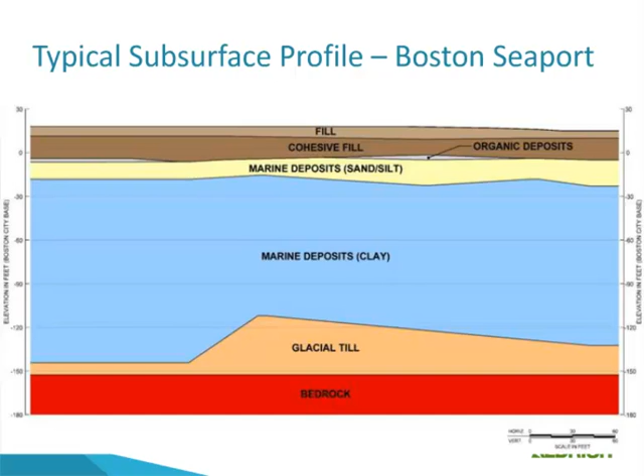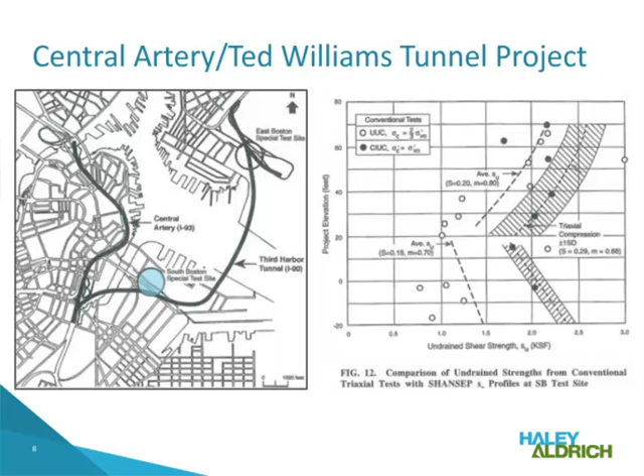Haley and Aldrich has a lot of experience with deep excavation in the South Boston Seaport area, here highlighted in blue. Another piece of infrastructure that also provided a wealth of information for geotechnical engineers in the area is the MBTA Silver Line, which passes basically through the center of the Boston Seaport area.

It would take all afternoon or perhaps more for us to talk about all of the things that we've learned from excavations in Boston Seaport. So I'm going to try and summarize some of our biggest lessons learned by using two example excavation projects, which I'll call Project A and Project B.

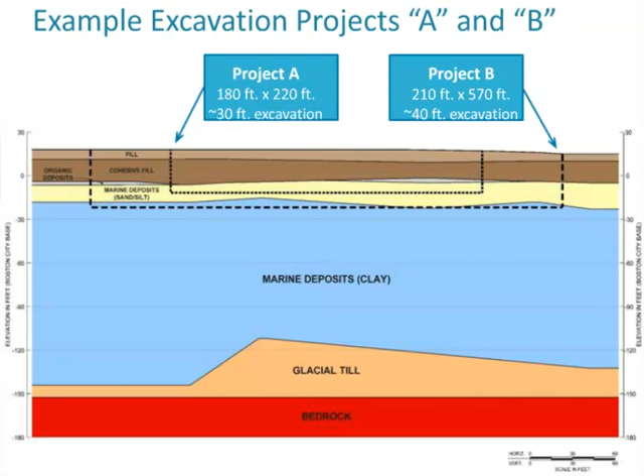Chronologically, Project A came first, followed by Project B. Project A was relatively large, 180 feet by 220 feet, and approximately a 30-foot excavation. But Project B was much larger, 210 feet by 570 feet, and about 10 feet deeper than Project A. You'll notice in both of these cases that the excavation goes plus or minus to the top of that Boston blue clay layer.

So, starting with Project A. Project A was supported by a steel sheet pile wall with one level of internal bracing. We monitored the excavation using inclinometers installed at several positions outside of the sheet pile wall around the site, and monitored throughout the course of construction.

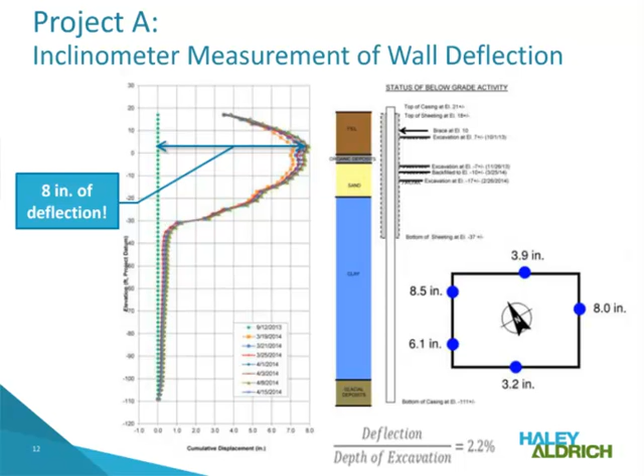I've got inches, so up to about 8 inches on the x-axis, but this inclinometer is 130 feet long and is toed into those very stiff glacial till deposits. So this isn't something that came out of nowhere. We were watching this story unfold throughout construction.

In another location on site, we actually accelerated construction to get the mat foundation in as quickly as possible. In both of these situations, either backfilling against the sheet pile wall to keep soil levels high or placing a mat foundation, both resulted in controlling excavation wall movement.

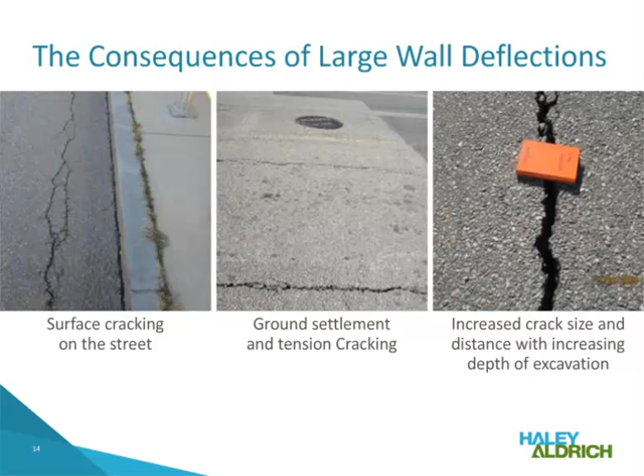So what are the consequences of 8 inches of deflection in your SOE wall? Well, there was surface cracking on the street, and there was ground settlement. While the city was not too thrilled with these results, you should also know that at the time this parcel was being developed, there were virtually no other major buildings in the area.

But how do you get to 8 inches of deflection? Possibly soil properties were too aggressive. Additionally, and definitely a large player in this case, the SOE system was not stiff enough. For instance, they could have used a heavier sheet pile, a concrete diaphragm slurry wall, or multiple levels of bracing. Another contributor could have been global effects, deep-seated movements in that Boston blue clay, or time-related effects for how quickly the excavation was proceeding. In reality, it was probably a combination of all of these things.

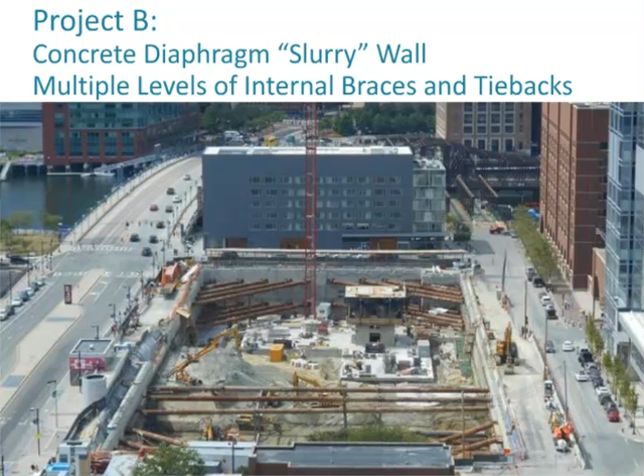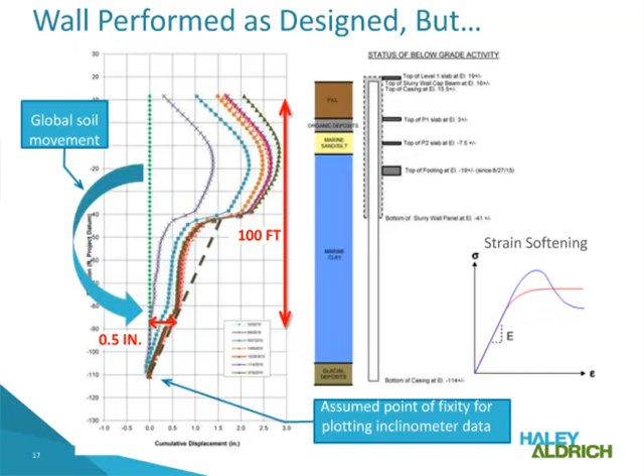So to summarize, it's really important to know your soil in a deep excavation area. Part of that is the subsurface investigation and soil testing. And then, even more importantly I'd argue, is understanding the soil models you're using for design and analysis. You need to know basically what you do know and what you don't know in terms of what those models are or are not taking into account.

Secondly, instrumentation and monitoring are critical for these types of projects. In the best case scenario, they are a validation of your design, and in the worst case scenario, they give you the opportunity to react before long-term project issues arise.

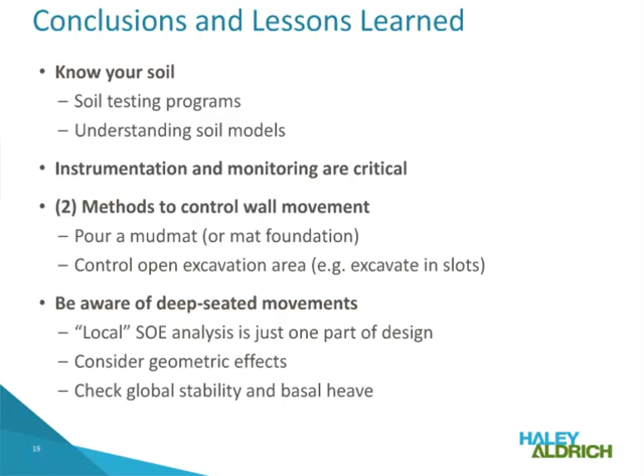Lastly, a caveat to beware of deep-seated movements. The local support of excavation analysis is really just one part of the design. As a geotechnical engineer, it's important to also look at the larger global effects, which take into account construction time and geometric effects. Checking global stability and basal heave is really important in looking ahead at how your project will perform. With that, I will conclude.

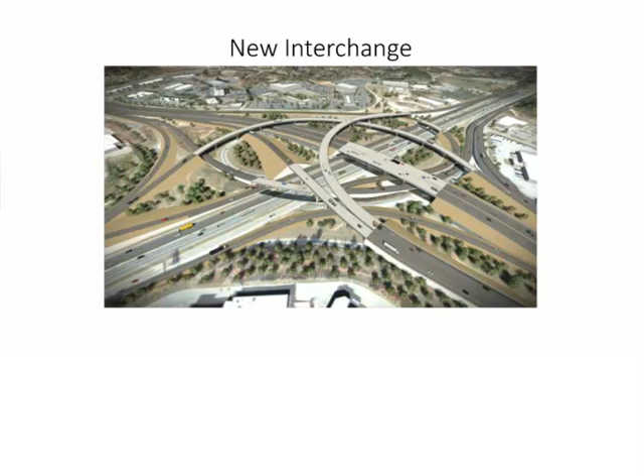More specifically: replacement of 5 miles of roadway, construction of 10 new bridges, widening 2 existing bridges, roadway widening beneath 1 existing bridge, construction of new embankments over 50 feet, and construction of new MSE walls in excess of 50 feet. As a member of the project team, we came up with some design-build concepts for some earth-retaining structures that I think were a little outside the box and saved the project some money and time.

One of these was a wall called Wall 32. Widening of I-385 in one section required a new embankment about 60 feet in height on each side. They decided to do this with MSE panels instead of sloped embankments. The existing travel lanes had to remain open.

The max embankment heights were on the order of 50 to 60 feet, with a total length of this embankment, or MSE wall system, of about 1,100 feet.

To install this full-height MSE system, it would have required one of three things, in order to keep the travel lanes going: either a 50-foot tall rigid temporary shoring system—sheet piles, H-piles, tiebacks, the whole thing—or laying back into the existing travel lanes, which was clearly not an option to maintain travel, or what we decided to utilize: a shored mechanically stabilized earth wall.

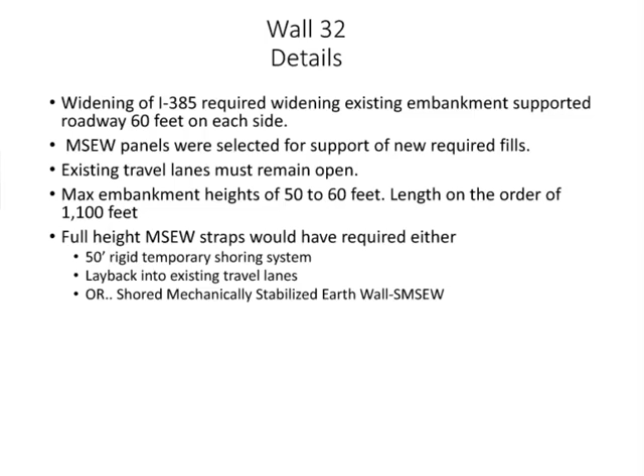For those not familiar with those, this is actually an NCDOT concept. Basically, the concept of the shored MSE wall is you install a permanent soil nail wall into these cut slopes. You utilize the permanent soil nail wall to account for the global stability of the system.

So you can shorten up your strap lengths when you build the actual wall. Instead of a 60-foot wall with strap lengths of 60 feet long, now maybe you're building a 60-foot wall with strap lengths of 30 feet long, going a little longer up over the top. That's obviously a little more cost effective. The added benefit is that when you're excavating, this permanent soil nail wall can act as a temporary support.

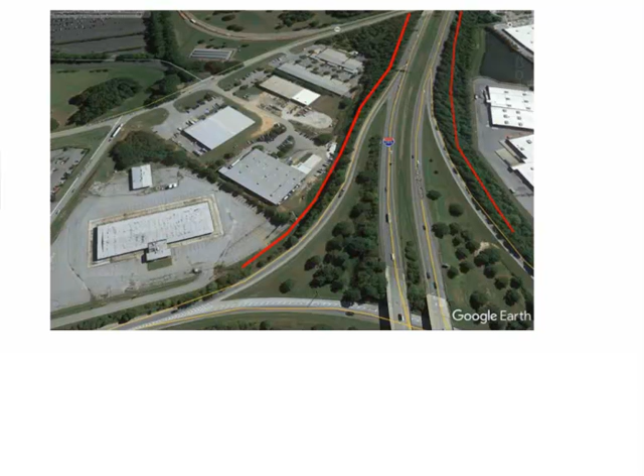So here are the existing travel lanes. On this next slide, the red line is basically the location of the MSE wall face. The blue line on this next slide was the location of what we called Wall 32, or the soil nail wall for the shored mechanically stabilized wall system.

Soils on the site consisted of typical embankment fill, fairly clean embankment fill in most areas, underlain by residual soils and then PWR—so a fairly typical profile for here.

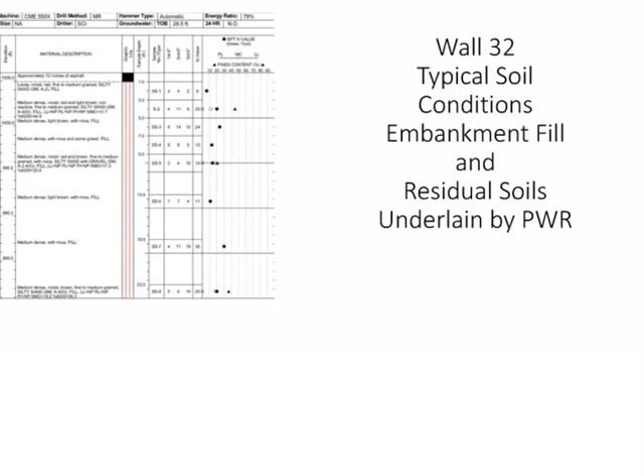This slide is just a general wall design. We had typically 25 to 35 foot nails, generally 5 foot by 5 foot spacing. Wall heights again from 10 to about 35 or 40 feet.

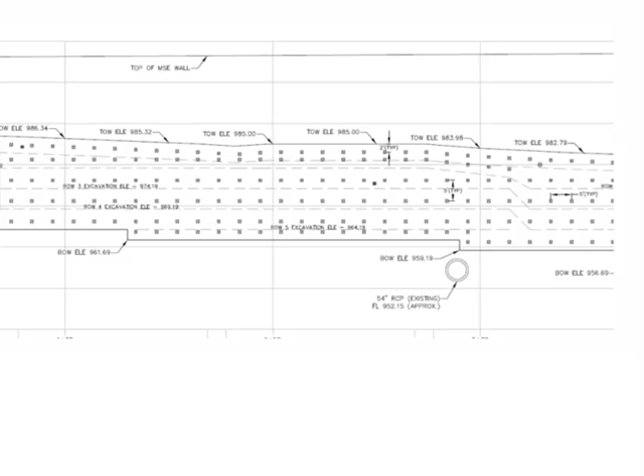Here's some of our construction phase photographs. Obviously our soil stands up pretty well for us—we're nailing embankment fill, and it was actually fairly competent. We did run into some debris in some areas, but nothing we couldn't fairly easily work around.

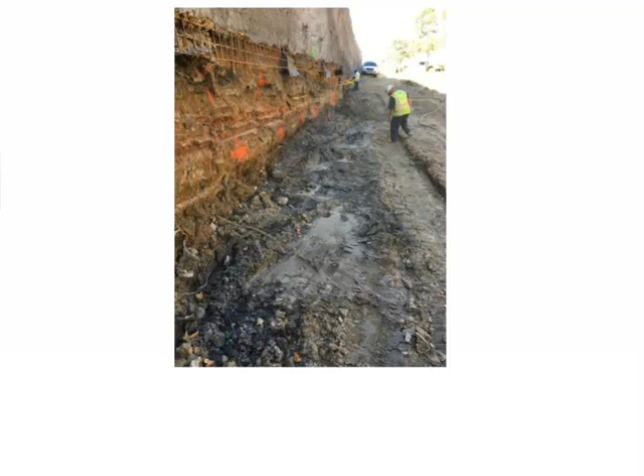Here's our end result. We don't need a terribly planar finish because the whole thing's being buried, but we do need to encapsulate the nail heads for corrosion protection.

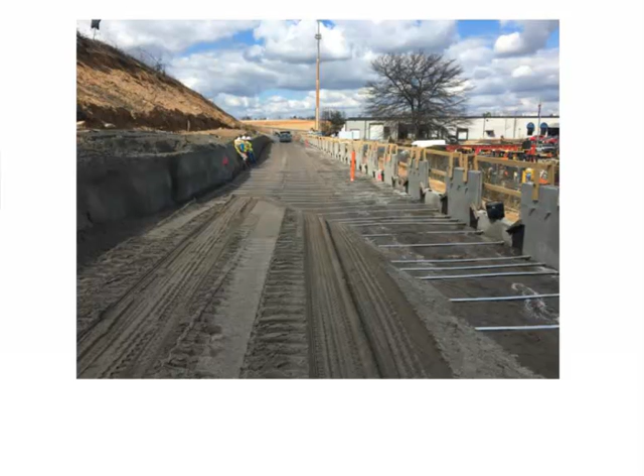This gives you an idea of the scale of the wall during construction—probably not a record-setting wall, but a fairly tall wall. You've got your straps running back to the soil nail wall. There's an FHWA manual on SMSE systems, and obviously there doesn't need to be a positive connection between the soil nail wall and the straps.

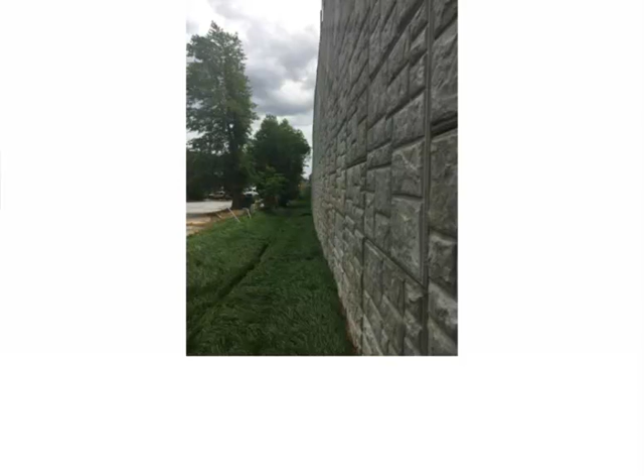So now moving on to another challenge we had in the project. This is what's called Woodruff Road Bridge, a heavily trafficked main thoroughfare in Greenville. This bridge goes over 385, and the intent was to widen that, so you'd have 2 more travel lanes on either side. Here's your existing structure, supported by a combination of driven timber piles and driven steel piles, supporting the embankment.

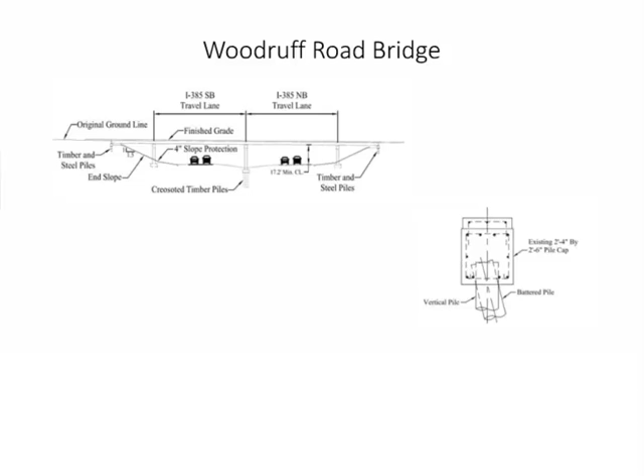So to widen this, we had to basically cut down right in front of the existing abutment and create a retaining system. Your existing condition is a typical concrete bridge with a concrete-faced sloped abutment. This shows you the existing condition and kind of the challenge we were given.

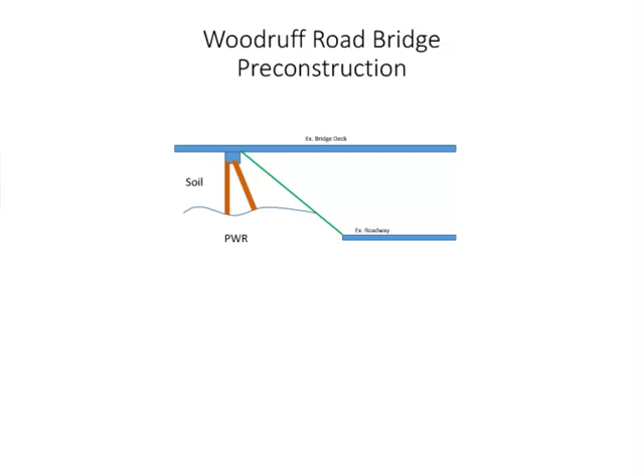We have these driven timber or steel piles in alternating batter—one vertical, one battered—driven down to weathered rock, but the bearing surface of those piles was above the new roadway surface because they hung up in this shallow weathered rock. So here is what the proposed new condition was: a wall directly up against the abutment.

Obviously the existing timber piles were projecting through the face of that wall, so you have an issue of the timber piles being in the way, and also as you work your way down, you're going to undermine the support of those timber piles. So we took that opportunity to come up with a solution that seems to have worked fairly well.

The department did not want us attaching positively to their bridge or abutment in any way. We suggested perhaps going through the bridge deck or attaching to the new abutment, but they did not want to do that. So what we proposed was a micropile-supported new pile cap with a haunch on it to grab the existing pile cap, and then a series of tieback anchors into that to basically provide support for the bridge.

This allowed us to work our way down and actually cut off the existing battered timber piles as we went, with temporary support in the interim phase, and install a soil nail wall to create the retaining structure.

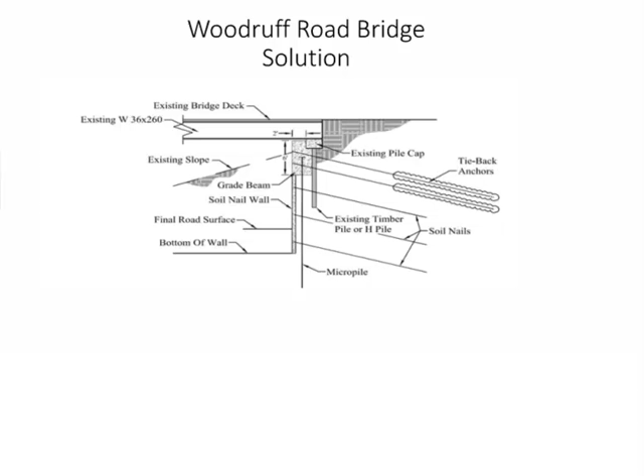Our general sequence: install and test micropiles to make sure we have adequate support there. Excavate the first stage of our bent cap. Temporarily support the individual timber piles as necessary with hydraulic jacks. So the battered piles that we would actually have to cut, we would use jacks to support these, and they would eventually get cast into the beam itself.

Install the micropiles, remove the battered timber piles as necessary to allow for the grade beam reinforcing steel, because they didn't want timber piles in a new grade beam for corrosion concerns. Cast the stages of the grade beam, and install our tiebacks. We actually staged the grade beam excavation and construction so we didn't have too large of an unsupported area at once. Proof test and lock off the tiebacks, and then proceed our way down in 5-foot lifts, installing our soil nail wall.

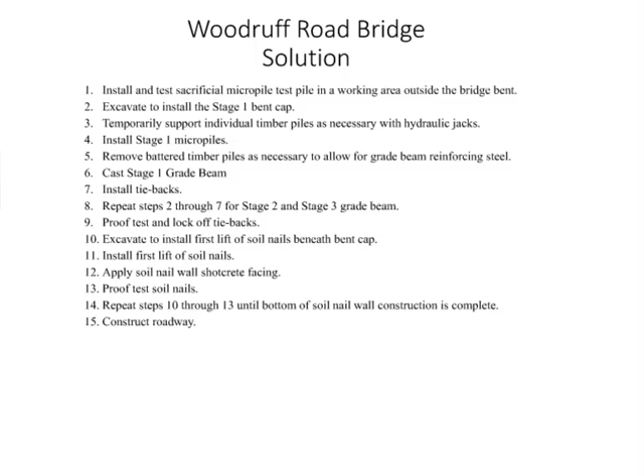Here's a little more detail on what we wound up doing. Again, you see the battered piles that we had to cut off, grabbing it all with the haunch and the tiebacks, and you can see the micropiles there as well.

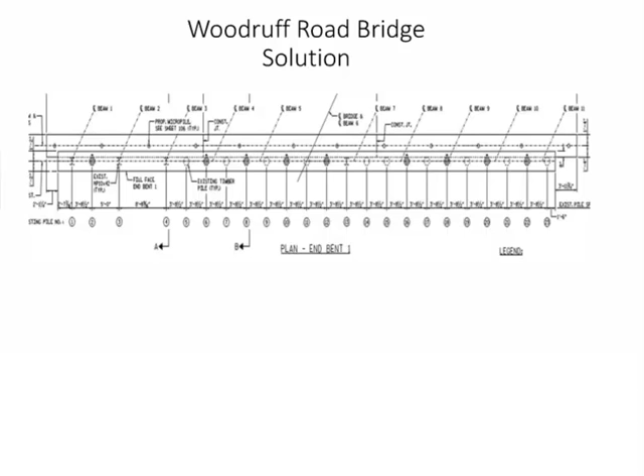Here is the start of our work. Obviously access is a bit difficult because we can't dig more than 4 or 5 feet at a time, so we had to use a limited access micropile drill to install these micropiles in some fairly tight spacing.

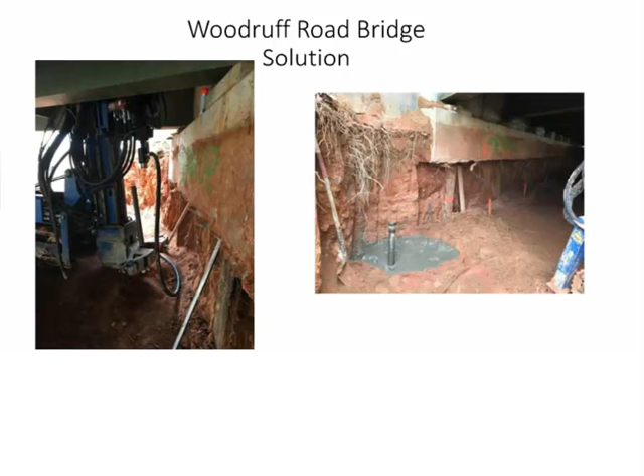As you can see, you have a micropile installed, and as you work your way to the right, you can start to see the existing piles excavated. We work in soils, fortunately enough for us, that have fairly high shear strength values, so here you can see we're able to make these nice 5-foot cuts, and here you can see the battered piles projecting through the wall face. Those were later supported by jacks and cut off.

Here's a section where they had actually driven steel piles. As you can see, here's our forming of the grade beam, with micropiles protruding into it.

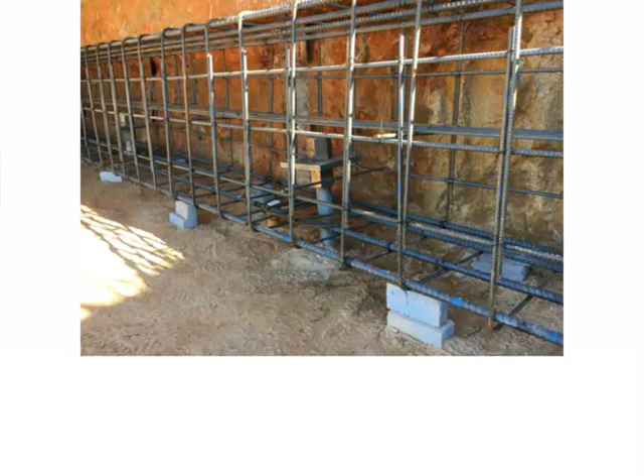Grade beam was cast and the tiebacks were installed in tension, so now we have secured the abutments. Of course, we've got to stage our excavation appropriately on the way down so that we don't cause bending issues with the micropiles. We can't go in there and make 7, 8, 9-foot cuts and expect those piles to do their job without some buckling. So we had to control the grading contractor on that end.

And here we are working our way down with our soil nail wall. You can see the new cap at the top and the soil nail wall as we work our way down. Another construction phase photo.

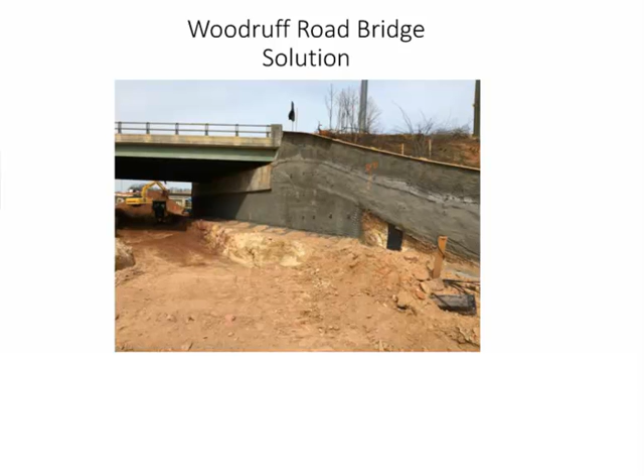And here is the end result. So instead of having an embankment there, you've now allowed for 2 travel lanes and captured the existing bridge. So all in all, we feel like it was a pretty good solution for everybody involved.

So thank you. Obviously, we had designers, SCDOT, the contractors, Flatiron and Zachry. We appreciated all their help on the project. So with that, I'll answer any questions.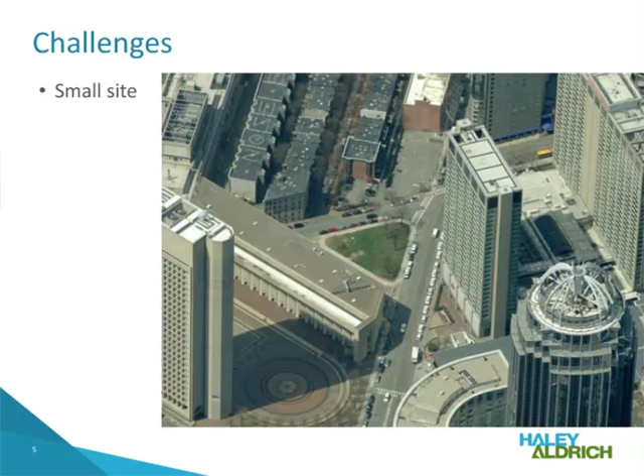Then there's construction in a busy urban environment. That's Belvedere Street there with the white taxis, which you saw in the previous picture, and it's usually a pretty busy street. As you'll see later, the excavation is pretty deep and it's conducted in soft soil.

Another significant challenge was protecting this 5-story concrete building right next to the excavation. The building is on shallow foundations, which would be vulnerable, especially during the excavation stage.

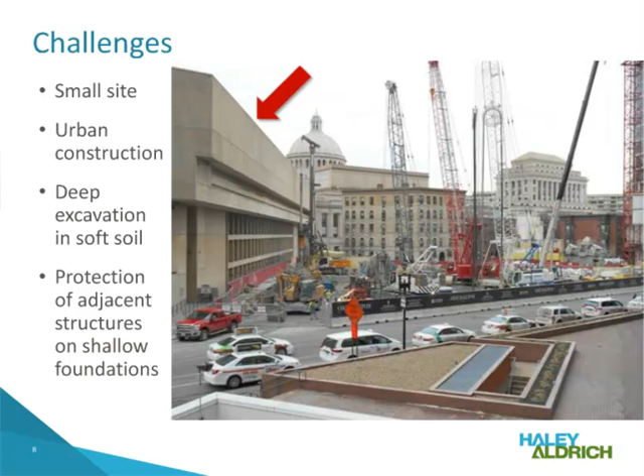Remember that ground surface here is about elevation 17.5. The geology at the site consists of fill, followed by organic deposits, marine sand, and a sliver of marine silt. Then you have the Boston Blue Clay, typically composed of about 5 to 10 feet of over-consolidated clay, which we call a crust, followed by a very soft material, usually weight of rod or weight of hammer material. Then you have glaciomarine deposits and bedrock in red. Bedrock is typically argillite in this area.

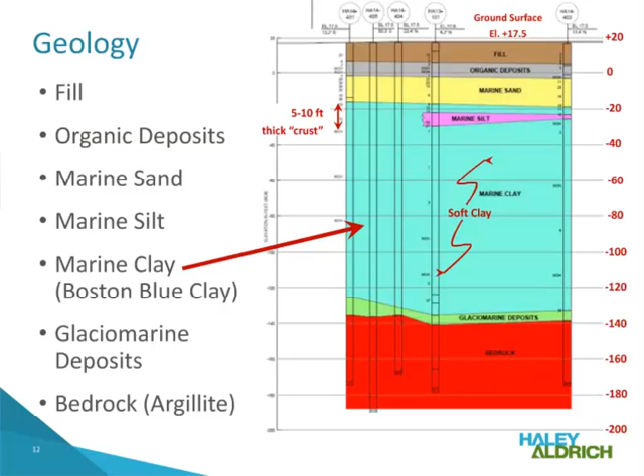The excavation went down to about elevation minus 30, so remembering ground surface is at 17.5, that's a depth of about 48 feet. The bottom of the excavation is in the soft clay, and essentially the 5 to 10 foot thick clay crust is removed, so you can't rely on it for any lateral support.

Furthermore, the adjacent concrete building is supported on shallow foundations in the marine sand, and those bear about 20 to 25 feet above the bottom of our excavation. So it's not good. That's very challenging.

As far as the supportive excavation elements, they were selected based on their ability to limit movement, but here they also doubled as foundations or load-carrying elements. The two sides of the excavation use load-bearing elements, or LBEs as we call it here, I think it's barrettes in other parts of the world, and slurry wall panels. These are shown in orange or dark orange and yellow, respectively.

The slurry walls and LBEs are basically rectangular reinforced concrete elements. LBEs carry high loads and are usually socketed into rock. The slurry walls may carry some load, but much lower than the LBEs, and those, in this case, terminate in the clay.

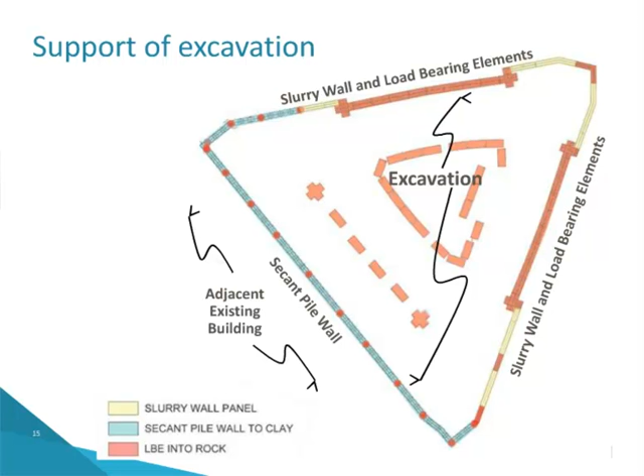During design, our analysis predicted that for 3 levels of bracing, the lateral displacement of the secant pile wall, which is adjacent to that building, would be about 1.7 inches. We were concerned that this would lead to excessive settlement of the adjacent building given its proximity.

Further analysis indicated that to control these movements, the bottom of the secant pile wall would have to be supported laterally before even reaching the bottom of that excavation. So after some discussion with the design team and the owner, we decided that below-grade, or what we call subgrade struts, were the solution. Basically, subgrade struts are unreinforced rectangular concrete panels installed below the bottom of the excavation to act as lateral supports for the embedded portion of the wall. Essentially, they're an internal bracing below the lowest excavation level.

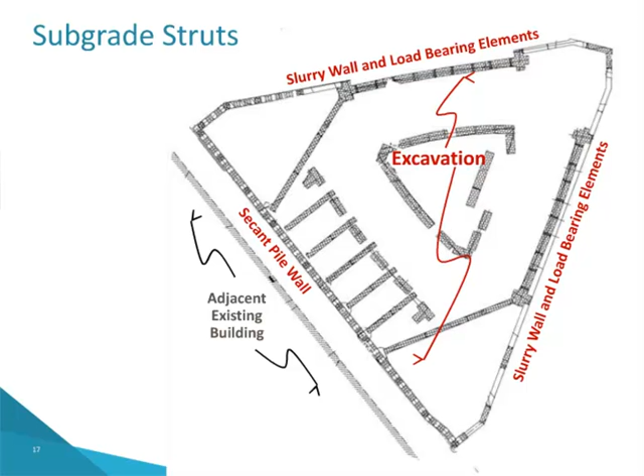Here's that excavation plan again, but with the subgrade struts shown. There are a total of 7 subgrade struts. Let me advance - so 2 of those struts connect to the LBEs on the adjacent side there.

And then the rest, or 5 of them, basically terminate in the soil. The longer ones that attach to the other sides are about 70 feet long, and these yellow ones that terminate in soil are about 32 feet long. These yellow ones rely on friction on the sides and on the bottom of the strut, friction with the soil.

Now let's look at the sequence of how these struts were installed by looking at this section AA here. Starting from the installed secant pile wall, the adjacent 5-story building is on the right there in gray, and the existing mat was cut off and removed.

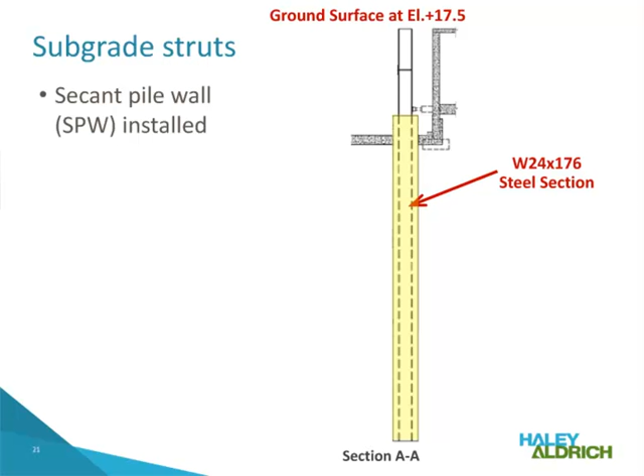They excavated to about elevation 2, and then from there, the subgrade struts were installed using slurry trench methods. The top of the strut is about -31, and the bottom is about -47, so that's a 16-foot high subgrade strut. They're about 2.5 feet wide and made of 2,500 psi concrete.

From elevation -31 up, that trench is filled with cement bentonite, so it's easier to excavate as they come down with the actual excavation. From that point on, the excavation proceeds as, quote, normal.

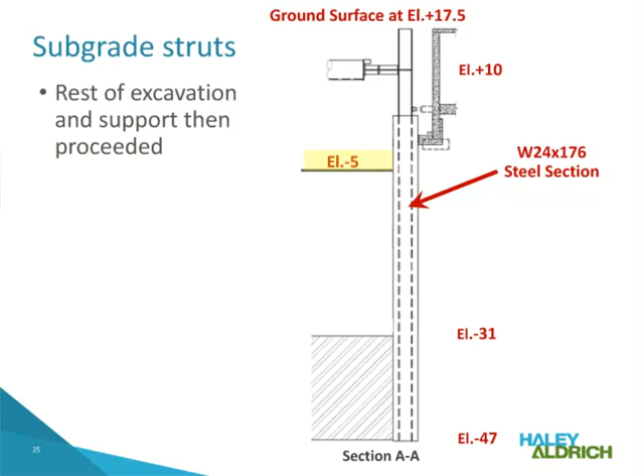So you have the first brace installed, and then you excavate down to -5 in this case. Remember, ground surface around the site is at 17.5. Then you have the second level of bracing, excavate down to the next level, third level of bracing, and then excavate down to the bottom of the excavation. So you see the subgrade strut is just below that starting.

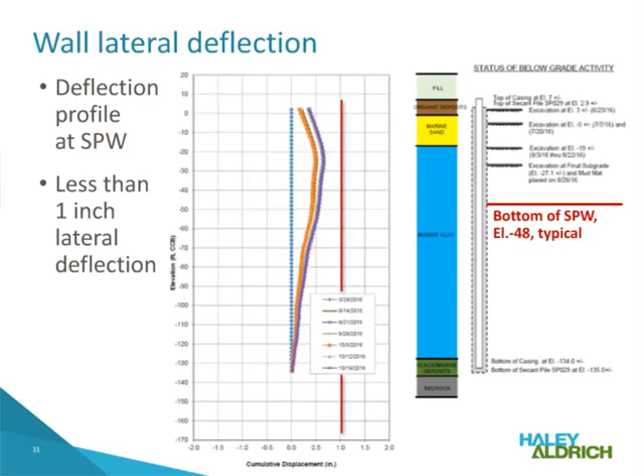The maximum wall displacement that we saw was less than 1 inch, shown by the red line there. And I superimposed the location of the subgrade strut here with elevation, and you can see the impact of the subgrade strut. It's pretty apparent in the shape of the displaced curve here.

Now, vertical movement of the adjacent building was also monitored. Here are some vertical displacement measurements at 2 survey points on the adjacent building, on the side closest to the secant pile wall.

I'm superimposing the secant pile wall installation period here. That process actually led to about 4/10 of an inch of settlement.

Then, after reaching the first excavation level with the first level of bracing, that's another 1/10 of an inch, thereabouts. Second level of bracing, that's another 1/10 of an inch. Third level of bracing, another 1/10 of an inch, seems like. Then reaching the bottom of the excavation, that's another 1/10 to 2/10 of an inch.

In total, the settlement was measured to be about 1 inch on that side of the building closest to the excavation.

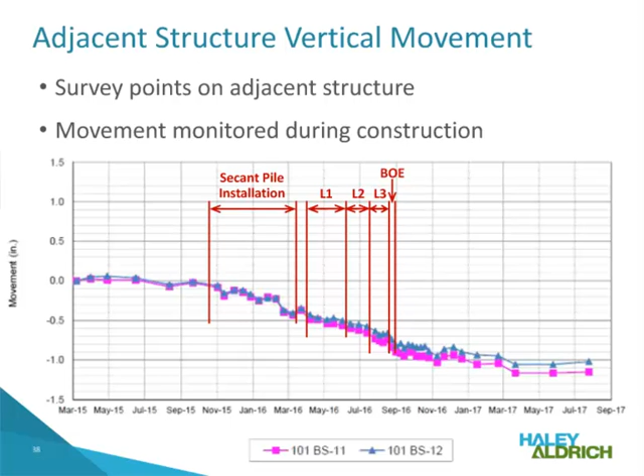So some conclusions. Well, first, excavating through the clay crust basically increases the risk of excessive movement, both laterally of the wall and any vertical movement of adjacent structures.

And to control the movement, we decided that subgrade struts, installed before excavating down to the bottom, were necessary. Roughly 50% of the measured movement, the vertical movement, occurred during installation of this secant pile wall, and that's really very difficult to predict.

The owner and design team chose to be proactive to mitigate movement and reduce risk by constructing these subgrade struts. Rather than be reactive, and see what happens and then take care of it, the owner and the team decided to install these elements.

And then subgrade struts were effective in controlling lateral movement of the wall below the bottom of the excavation, and that resulted in limiting the vertical movement of the adjacent structure.

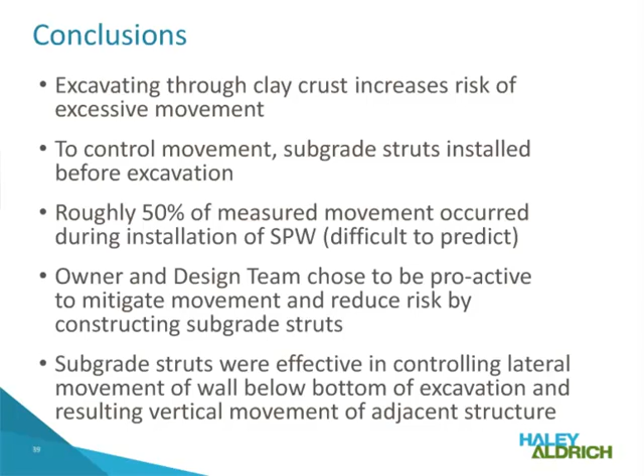Hey, thanks, Jean-Louis. That's very interesting, and it looks like you've got some questions, so go right ahead.

The first question: how is the contact made between the subgrade strut and the secant piles? That's a really good question, because if you leave any slack between the subgrade strut and the secant pile, it's pretty much useless. They attached a fitting to the side of a clamshell bucket that followed the shape of the secant pile wall, so it was scraping against the wall as it dug the trench. That ensured there was no slack between those two elements that would be compressible, which was a really important aspect of the construction.

Did the shorter subgrade struts use passive resistance for lateral support? That's a good question. The ends of those would have been roughly 2.5 by 16 feet high, but the length and the contact for skin friction was pretty significant, so we did not explicitly use passive resistance at the tips—we designed those mostly using friction.

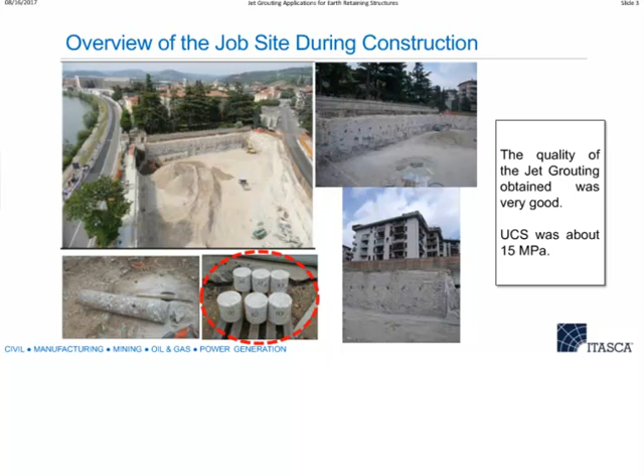To do the numerical modeling for this project, we used the plastic hardening constitutive model. We didn't use Mohr-Coulomb because it's generally not acceptable when you have both loading and unloading going on, and we care a lot about deformations. The stress path is more complex, and with Mohr-Coulomb you have the same modulus essentially throughout the loading, basically no degradation of modulus with shear strain, and no different loading and unloading or reloading modulus. When we calculate stress resultants like moment and shear force, they were underestimated.

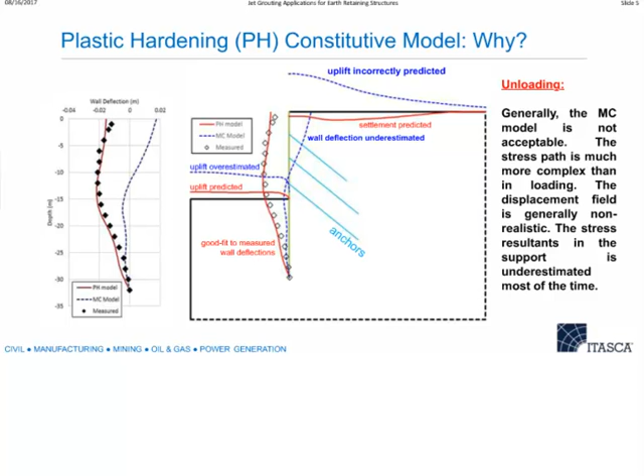The simulations done using the plastic hardening constitutive model are more realistic. What we're showing here in red are the results from the plastic hardening model, compared with the results obtained at the site - the actual observations once this project was carried out. You can see that the plastic hardening model did a relatively good job in predicting the deformations and other quantities.

Just a little background on this plastic hardening constitutive model - it's used worldwide now, well known inside the civil engineering geotechnical community. In many areas, such as excavations, foundations, and tunneling, it's becoming a standard model. A lot of regulatory agencies, especially in Europe, now require, or at least strongly endorse, that people use this model instead of Mohr-Coulomb. It's relatively easy to calibrate and use similar parameters as what we get from site investigation and lab tests. It's available in a lot of software, such as Flac3D, Plaxis, and MIDAS, so you can easily use any one or compare results.

The only thing I am going to show is just the very basic concept of how the model works. If you look at the figure on the left, it is showing how a typical Mohr-Coulomb criteria would be, which is just this failure envelope.

As opposed to that, this plastic hardening model has this shear failure envelope, which has a shear hardening yield function. We also have the volumetric hardening cap yield function, which allows you to consider the effect of over-consolidation ratio of soils.

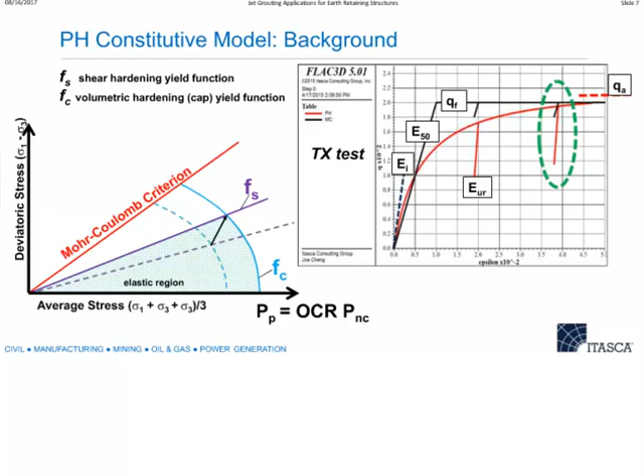Whereas with the plastic hardening model, you can see you get this modulus reduction as a function of shear strain, and then a different unloading, reloading modulus. This is kind of important to capture those deformations properly.

In terms of modeling, we do the stress initialization. For all these kinds of models, it is important that we first set up the model and initialize the stresses. So we either use elastic or Mohr-Coulomb models so that we have stresses in place, because before we turn this model on, we don't want to be changing stresses which are not realistic, because these models are very sensitive to stress history.

So we have all the stresses in place, and then we turn over the model to the plastic hardening model, and then we can assign properties to each zone as a function of depth, or if you have a variation along the horizontal direction as well.

The unit weight is only 15 kilonewtons per meter cube, and it seems a little low because of the original soil, because all this air that jet grouting uses, the unit weight kind of decreases a little bit. Then we have a cohesion, which is estimated from unconfined compressive strength, and then we have a friction angle of 38, which is the same value as the existing soil.

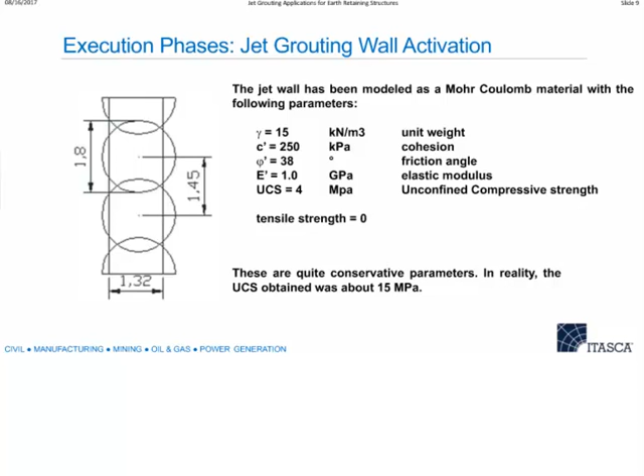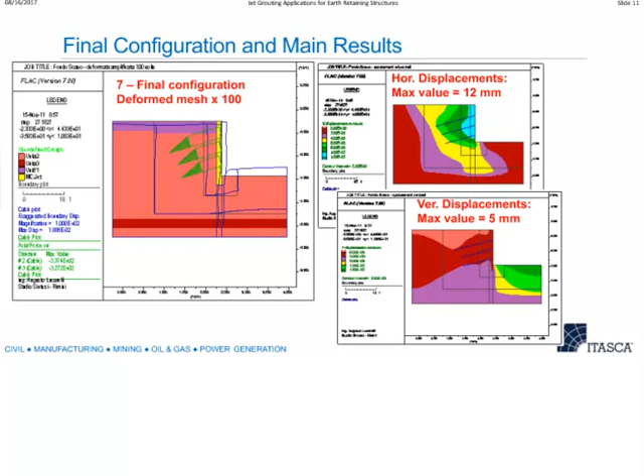This slide mainly shows the deformed mesh, which is the deformations magnified by 100 times, just to show the shape or the mode of deformation, and also the forces. The maximum horizontal displacements were about 12 millimeters, and the maximum vertical displacements were about 5 millimeters, so they were quite small.

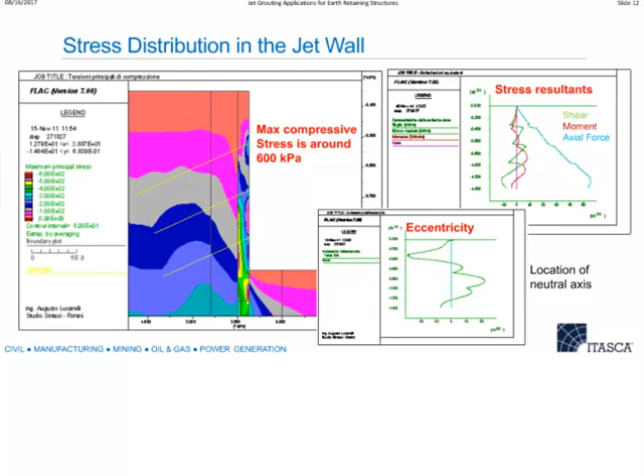So far we just saw the performance. Now the next step was to evaluate the factor of safety, and we used the strength reduction method. The reason why this is better is because you can monitor the structure behavior as you reduce the strength properties.

You can track the stress resultants such as forces in anchors, bending moments, and then you can track hierarchical failure, like whether the structural elements have enough capacity, so when failure occurs, is it the structural elements that start failing first, or is it the soil that starts failing first? Then you can evaluate the influence of structural element capacity on the potential global failure mechanism. Another important thing is you can observe displacements, how they develop.

So you can track whether you are satisfying the service limit state and not just the ultimate limit state, because sometimes it might be more critical compared to the ultimate limit state. So you can also track multiple failure mechanisms. Most of these things you cannot do with limit equilibrium method, and also you have to make assumptions on the forces that structural elements are exchanging with the soil mass. Finally, you can do a local strength reduction for a structural element itself, or for a limited portion of the model, like a single layer, as opposed to strength reduction for the whole model.

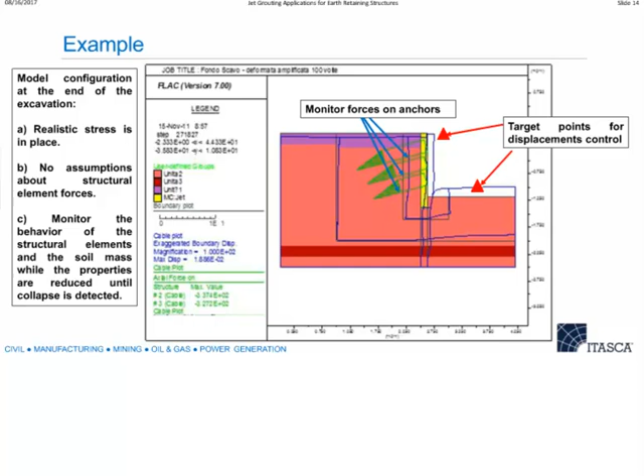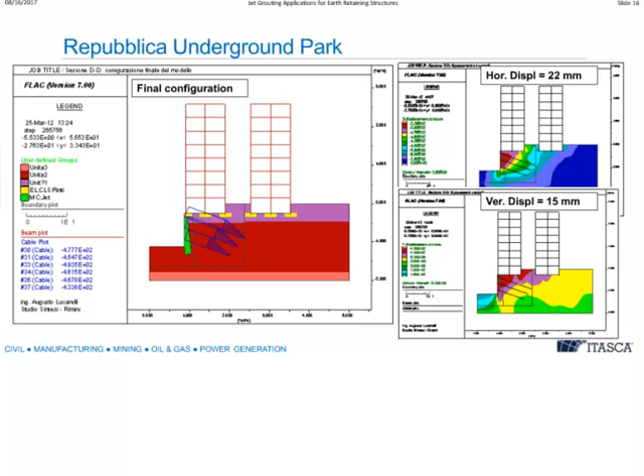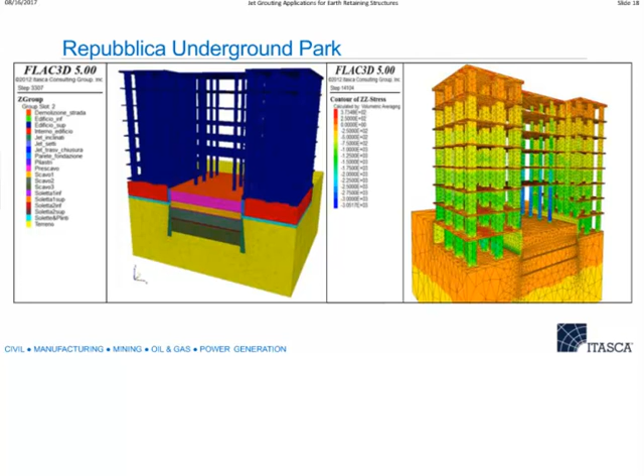This is just another 3D model for that, to look at 3D effects along the smaller extent. So you can see the whole thing was modeled using zones itself, and then we also had the structural elements like piles being represented separately. So most of the details were actually put into the model. So it was a very detailed model, to basically evaluate the performance of these structures due to the excavation.

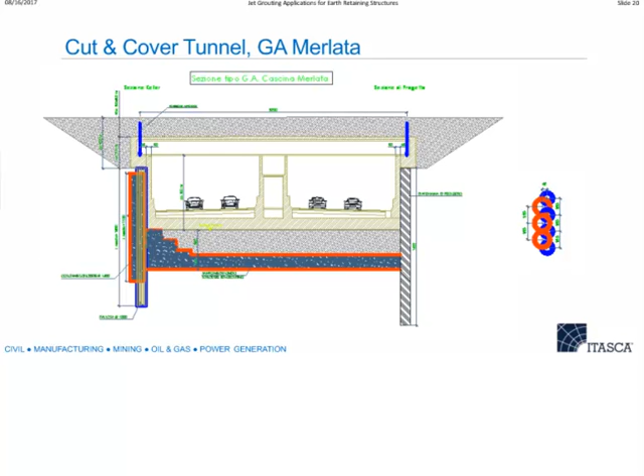All right, to conclude, jet grouting is a valuable and competitive alternative to traditional support systems. It's quite flexible and adaptable to many circumstances and soil conditions. You can use it for sands, and you can also use it for cohesive soils like clays. It can be executed using relatively little equipment, but what it does require is a highly skilled, experienced, and specialized contractor to guarantee high-quality results. And what is also recommended is that one execute field trial tests to calibrate these properties, like the UCS was for this case, in order to get an idea of how good a result we are getting.

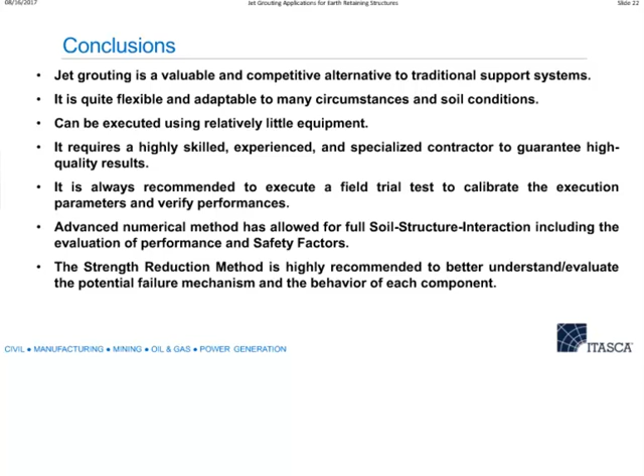Next, advanced numerical models allowed us to capture full soil structure interaction, including the evaluation of performance and safety factors. And finally, we recommend using the strength reduction method to better understand the potential failure mechanisms and behavior of the individual components. Thanks, and I'll take any questions.

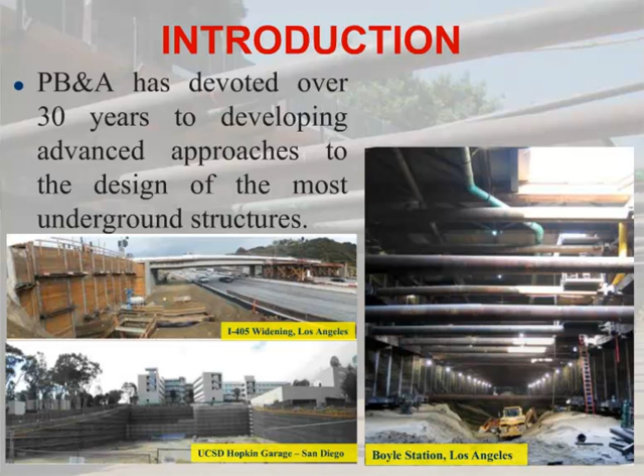Talking about Hope Station. Hope Station is part of the metro extension in downtown Los Angeles. There are two separate lines. One is regional, which is our part, the design of Hope Station, and then from Hope Station the train goes to Broadway. Then there's a west side which includes three stations: La Brea, Fairfax, and La Cienega.

Hope Station is essentially the part of it that is underneath Hope Street, but many of these other stations, like Broadway and parts of the West Side, are underneath a live street, so the excavation, support, and traffic control while digging underneath these stations is an extremely challenging task.

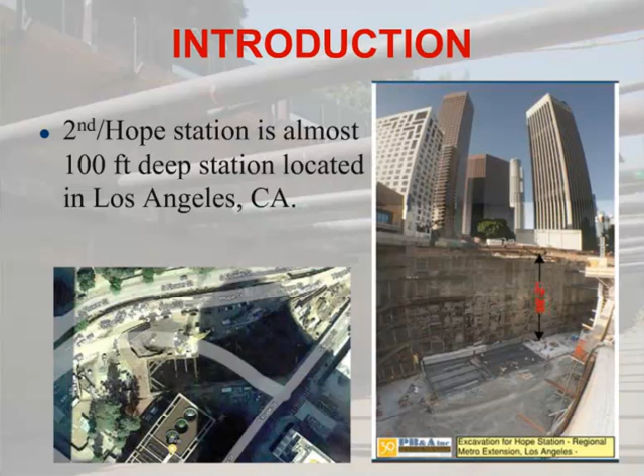This slide was animated and doesn't look right on my screen, but it shows the several sections that we are going through in the station.

The two ends are what we call hammerheads. The train goes from one end to the other, and the two ends are hammerheads, where the tunnel enters and exits. In this case, we had internal bracing in that area. For the section you're looking at now, we've used tiebacks on most of the station, but in certain areas we used internal bracing to support this excavation.

The stratigraphy of the station is about 20 to 25 feet of upper layer alluvium, and below that is the Fernando Formation, which is basically a claystone with very high shear strength.

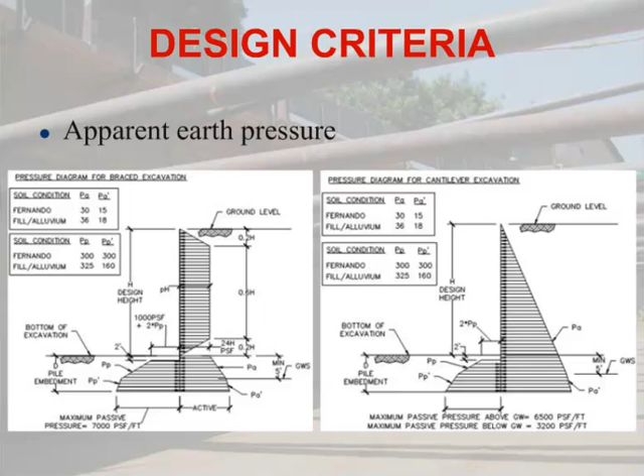We have many other design criteria. Due to the time limitation in this presentation, I'm going to quickly go over some of the important ones. One of them was the embedment depth requirement.

In the design criteria, we're told we have to at least have 8 feet of embedment where the excavation depth is less than 20 feet. If it's greater than 20 feet and less than 40 feet, it should be at least 10 feet. And if the excavation is greater than 40 feet, we need at least 12 feet of embedment. No matter what we get from our software analysis, we have to meet this criteria on top of that.

Then there's the passive resistance criteria: the tributary width of the passive resistance is 2 times the drill hole diameter. The drill hole diameter in most areas is a 36-inch drill hole, which is 3 feet, and the passive pressure can act over 2 times this distance due to the arching effect.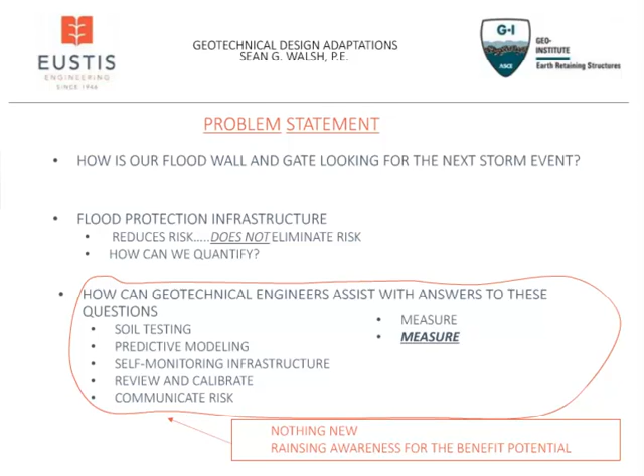Whether it's fake news or real news, both sides of the news, it's all the news.

Since 1932, Louisiana has lost about 1,800 square miles of land, all sides agree. From different storms between 2004 and 2008 alone, 300 square miles of marshland were lost to hurricanes Katrina, Rita, and Gustav.

Major causes are climate change, sea level rise, subsidence, hurricanes, storm surges, disconnection from the Mississippi River, and other human impacts. So some of the previous design methods need to change as much of our other coastal conditions are changing.

Right after Katrina, we had the $14.5 billion federal stimulus put into the city to put up protection systems, and with that came federal guidelines on how to design these structures. That's now in place. The federal government put together an incredible set of guidelines, which the system has been built on. It's robust, and it works, and it's been tested. It works well, but it's top-notch level.

Now the nearby local and state municipalities, levee districts, and communities are trying to do similar designs because we have the same problem outside of the city, but the funding isn't in place.

To adapt to that, the Coastal Protection and Restoration Authority of Louisiana is really leading with this adaptation through the Coastal Master Plan that came out in 2017, as well as a set of geotechnical design guidelines we're working with here in Louisiana. They came out in June 2015 when published, and they allow for a lot of latitude in the types of structures we can use to protect ourselves from storm surge.

The big difference between the two is going to be that concrete costs more to install, but steel has less construction cost. It's also faster for construction time.

It requires more O&M though, because it's more flexible, which gets into the problem we had. We were coming up with a steel design that had too much flexure, too much movement, because it had less rigidity. The Corps' guidelines state there can't be any lateral deflection of more than three quarters of an inch on the structure, and that was the catalyst for soil structure interaction analysis.

But how much should it deflect? You can't just say it can go three quarters of an inch. The state has been helpful in coming out with other design criteria, so we can use site-specific lateral load testing and develop our own site-specific p-y models.

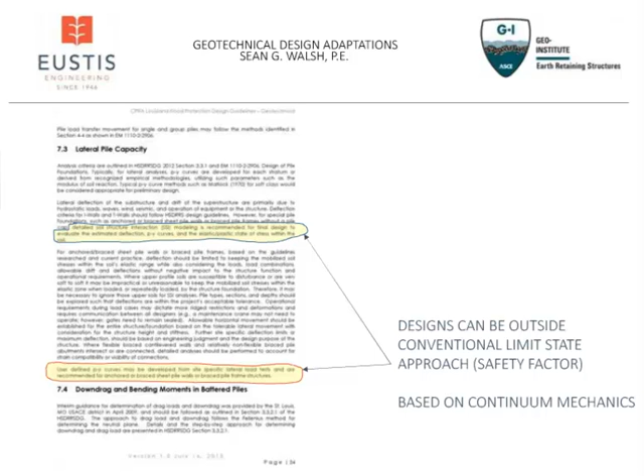But the unfortunate part is standard testing and characterization. We've got UU tests, UCs, 1D consolidation, standard practice - but it doesn't yield the amount of soil data results you're going to need for a good soil structure interaction analysis.

And for in-situ testing, we're doing cone penetration testing with pore water pressure, but a pressure meter test would be more suitable for developing p-y curves and moduli for use with these FEM models.

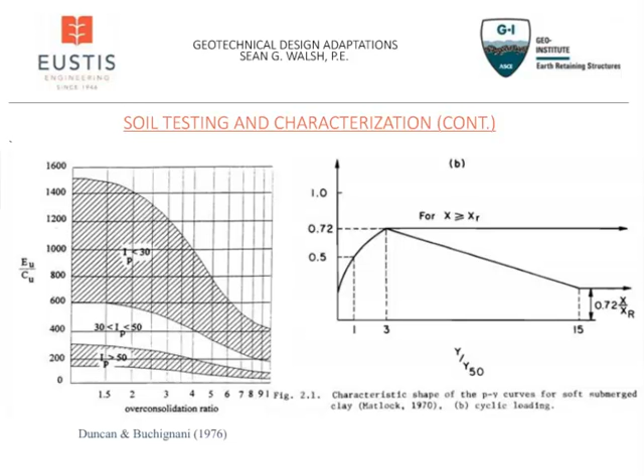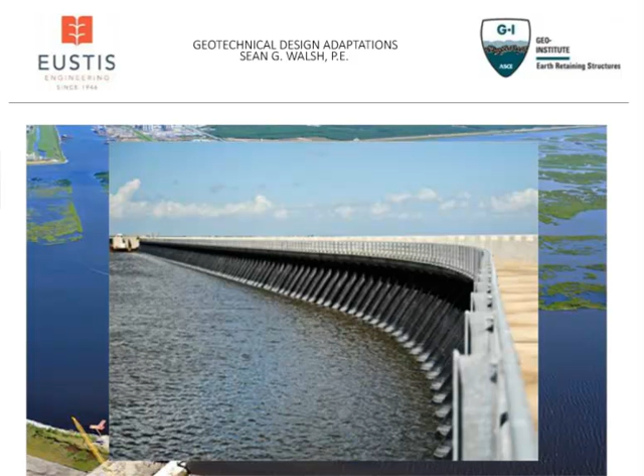There's a lot more information we have now that we can use to really economize, reduce risks in our designs, and make them constructible. Here's a picture of the Inner Harbor Navigation Canal surge barrier, a similar design, sheet pile wall with battered piles in the back. They did their own lateral load testing at the site on a large 66-inch pile, and here's a photograph of that lateral load test ongoing.

Just two curves here: the top one and the orange one. The orange is what we'd get from a typical Matlock analysis using commercially available programs like LPILE. It's conservative, and it's based on a pile that was 12 inches, but these are 66-inch diameter piles.

They're in soft soils, I understand that, but when we laterally load test it, we see that we're getting a much stiffer response with respect to the p-value and the p-y, 25 times stiffer.

We need to get away from conventional design and into site-specific design using this information, this testing, these lateral load tests. This was a push we're making with the state to show them the value of what they get back from this, because this is just one site.

We can do numerous sites. We can have site-specific data for southeast Louisiana, and we can get away from using the same Matlock curve that the rest of the country is using, because it's not applicable in all locations.

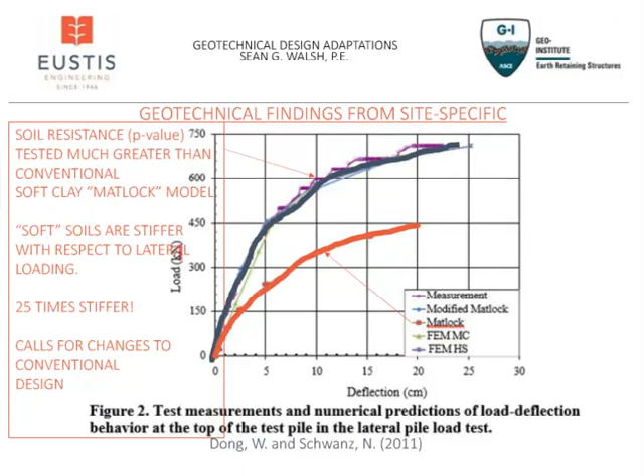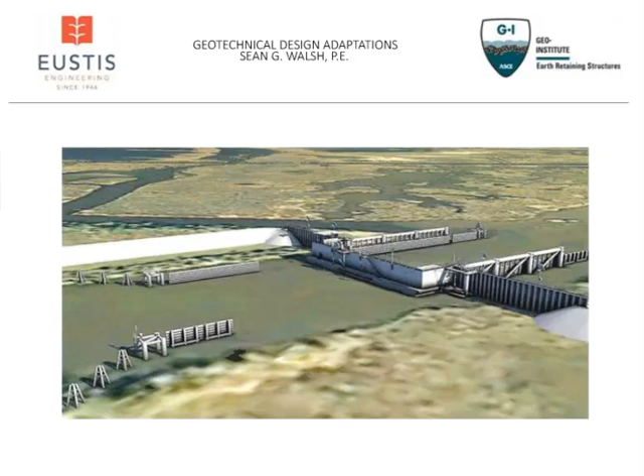What are we evaluating in this? We're looking at where the sheet pile wall is coming into the receiving structure, and how much the sheet pile wall is actually going to deflect. We have soils that only have 250 PSF strength down to 30 feet. What's the sheet pile going to do? Is the soil going to yield? If it yields, is it a problem? Can the structure deflect and move with it?

All we're trying to show here is that with soil structure interaction analyses, which are not the common way for designing flood protection down here right now, you can allow these structures to move, you can allow them to deflect, and be within the tolerable limits of still being able to perform for the next 5, 10, 15, 20 years.

So we developed a soil structure interaction model with SLOPE/W using site data that we had, and we were also able to use the IHNC data to calibrate our site to our soil structure interaction model.

Like I said, it will perform as we intended. Field measurements, once this gets built, the best thing we can do is monitor this as the storms come in, before, during, and after, to see how it compares to what we were predicting, because these structures are going to be in place for a long time. We're not constructing something and then pulling all of our stuff out and leaving. It's going to be there for protection for a long time.

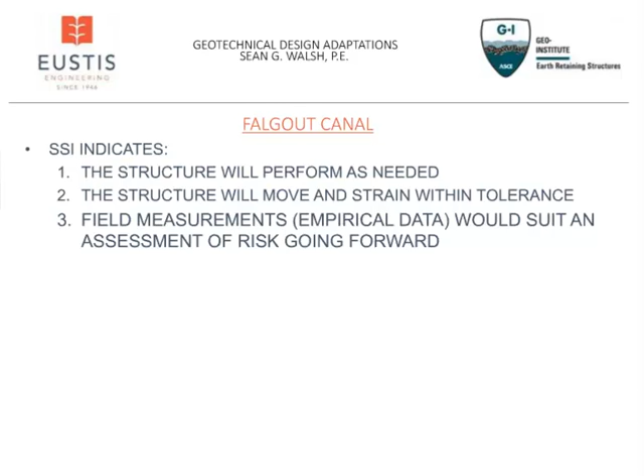So the real thing that we need to be doing is monitoring the equipment and calibrating our designs over the years. That's how geotechnical engineers are going to help adapt to the geotechnical design requirements to reduce risk for landowners.

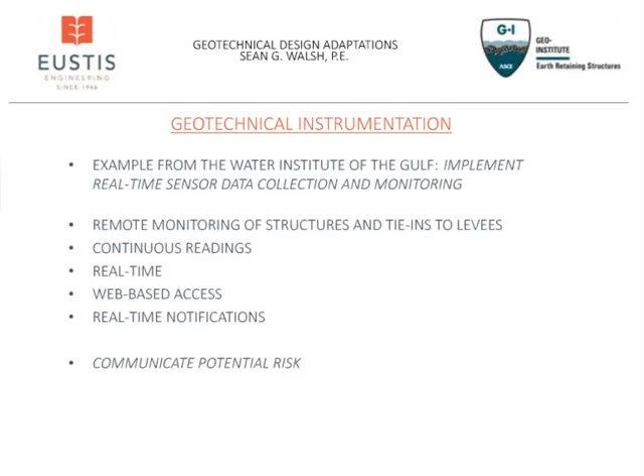This has been our recommendation to the state, and they've been very forthcoming with adopting this information. We're able to show that with actual instrumentation, we produce better predictive models and substantially reduce risk and improve the likelihood of success for the project stakeholders. Of course, there's an incredible cost economy to it as well.

So in general, these are the conversations we've been having with our municipalities, levee districts, and elected leaders here in Louisiana: not only are we used to designing and building, but we have to get used to including the costs and concept of watching these structures, because they're living, breathing machines that are going to be going on for a long time. We have to be measuring, revising our analyses, and calibrating it to truly understand how we're going to assess risk.